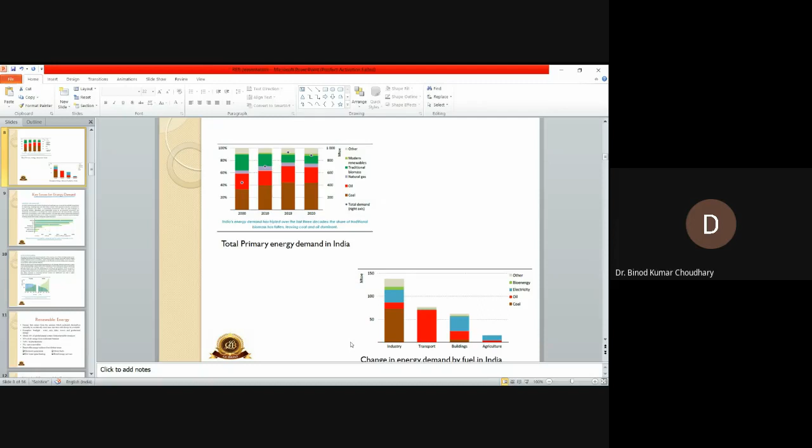Excuse me sir, your slide is not changing. Hello, sir, yes? Your slide is not changing, hello sir. Yes ma'am, tell me. Your slide is not changing, sir. I guess... okay, let me check. Okay, one second. Thank you, sir. Okay fine, just a second. Yeah, now it's okay sir, thank you. Now is it fine?

Yes sir, the total primary energy demand in India—is it visible? I am showing slide number 8.

Yeah, this is slide number 8, sir. Total primary energy demand in India.

The graph on the upper side shows the total primary energy demand in India, which shows the data for total demand: coal, oil, natural gas, traditional biomass, and modern renewables.

We can see it by the different colors. It is in terms of million tonnes of oil equivalent.

Again, we can see the change in energy demand by fuel in India. We can see how industries, transport, buildings, and agriculture utilize different types of energy resources like coal, with around 70% being utilized by industry. These are the changes in energy demand by fuel in India that will occur in the future.

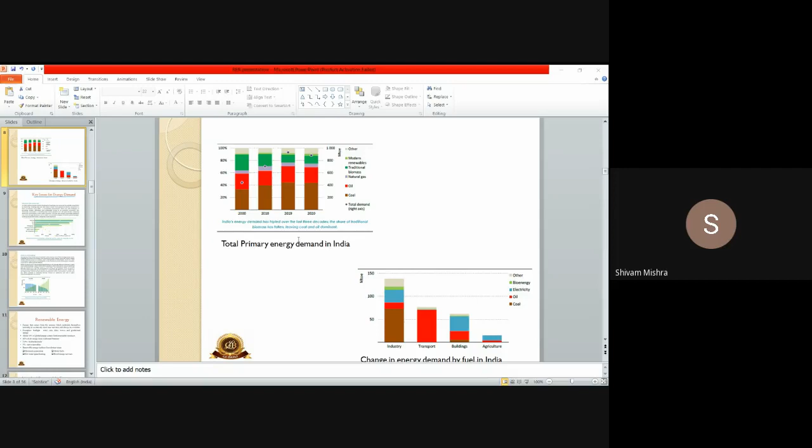Hello, am I audible? Yes, sir, you are audible and visible. Your slide is not changing, please change the slides also. I'm extremely sorry, I'm changing this but it's not being changed, there's some problem. It's okay, just go ahead. No, shall I go with this? If I'm projecting the screen and switching to slideshow mode, it's not being changed. You can put it in PDF format so you can change it. Okay, just a second, let me reshare my screen. Just wait a second. Okay, it's okay, thank you, thank you.

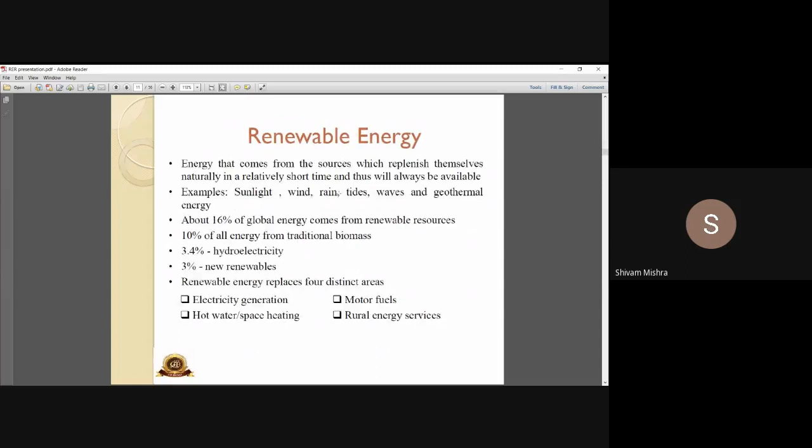So why we need renewable energy. I was discussing this, that energy is a prime source of economic, social, and industrial development of a country. Increase in world's energy consumption day by day means if the energy consumption is increasing, it cannot just be met up by the conventional energy resources. There has to be some unconventional energy resources as well, that must be clean and green energy resources as well. So here comes the need of renewable energy.

Next, still 70% of world's electric generation depends on thermal generation. It means it utilizes mainly thermal power plants. Due to global warming and some emissions constraints, the energy policy makers are having some energy constraints, so the thermal power plants are now being shifted towards the supercritical cycle, and other thermal power plants are also coming into the picture, like those which utilize solid oxide fuel cells. They are based on some CO2 Rankine cycle. So the world is now being shifted from coal and thermal power plants towards renewable energy resources, and they are mainly playing a role to meet up the energy demand.

There are lots of social and economical issues as well with the conventional power plants. World economy is looking for sustainable development, means one has to survive, that plant should be survived for a longer period of time, and that should also not harm the environment as well. So this gives the need and the birth towards the renewable energy sector.

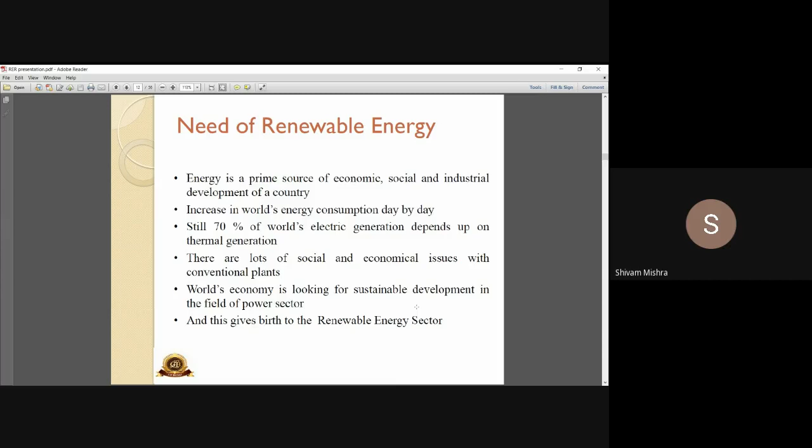So what are the different forms of renewable energies? Here we can see solar energy, wind energy, hydro energy, tidal energy, geothermal energy, and biomass energy. These are some stats that we can see.

These are some stats we can see, on the upper side it shows production, imports, and import dependence. These data are just for India, and this shows that India's domestic production of fossil fuels has not been able to keep pace with the demand, leading to a rapid increase in import dependence over the past two decades. Means we are not able to cope up with the conventional energy resources which are being produced in our country itself. In fact, we are importing this in huge amounts. The graph itself is sufficient to explain that coal, gas, and oil, we are hugely dependent on other countries. So we'll have to import these, and this again results in very higher cost, and obviously it affects the GDP and the economy of a country.

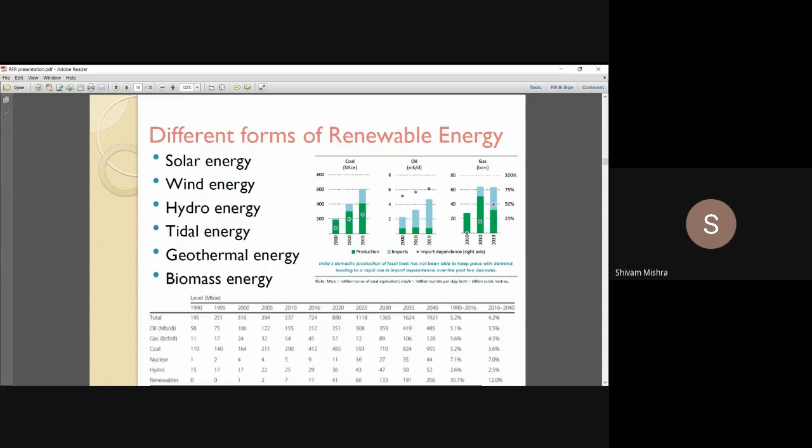This is the annual power sector capacity additions, and with coal capacity growth slowing down and solar PV and wind ramping up, the share of variable renewables in installed capacity has doubled since 2014. The graph shows that the total capacity has doubled as the solar and wind power plants have become functional, and they are also now contributing towards the energy demand rate. So these are taking over the thermal and other conventional power plants, oil, gas, and coal, and these are also playing a very vital role in the economy of our country.

How the solar and the winds are operating, how the solar and the winds are being functional.

This is the most remarkable story in India's power sector in recent years: the growth of solar PV and wind, which have rapidly increased their share of the overall energy mix, as coal and hydro power capacity growth has been slow and steady. Over the past 5 years, solar PV capacity has grown at an average rate of 60%, and wind capacity around 10%, outpacing the 7% growth in overall installed capacity.

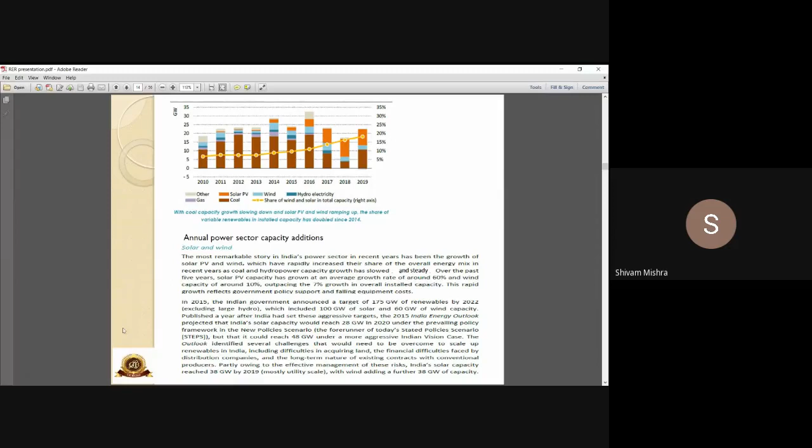So solar and wind are playing a very vital role in meeting energy demand right now.

This brings us to renewable energy utilization and the need for storage. The introduction of variable renewables is one of the primary drivers behind the renewed interest in energy storage. Energy should not only be produced from conventional or renewable resources, it should also be stored in some kind of device, from where we can utilize it further for our consumption.

Hybrid systems and energy storage can play an important role in making renewable-energy-based power smooth and stable. For example, a mandate from the California Energy Commission in the USA requires 1,300 megawatts of storage by 2020.

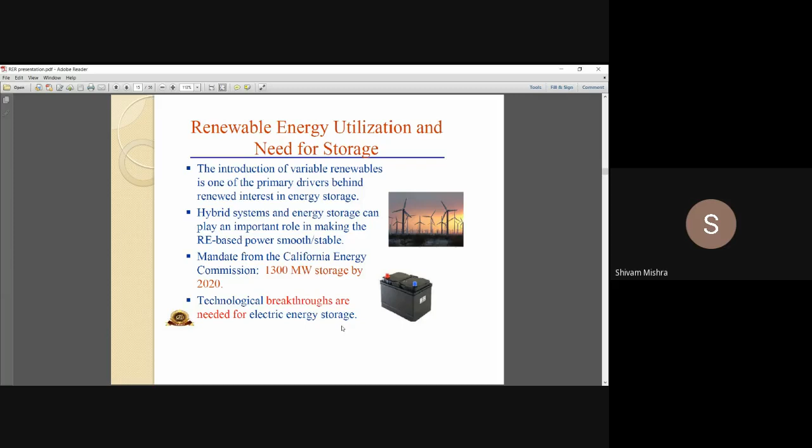Technological breakthroughs are needed for electricity energy storage. Here we see the variety of renewable energy based power generation and storage technologies: wind energy, solar, solar thermal, tidal, micro hydro, geothermal, bioenergy, and hydrogen fuel cells.

These renewable energy resources have to be stored using high power and high capacity batteries, supercapacitors, pumped hydro, and compressed air energy storage.

Everyone knows about the flywheel. It stores energy by increasing its speed, and when it supplies energy back, its speed decreases. Thus it acts as an energy storage device.

Then there are flow batteries, and hydrogen storage. Hydrogen is a future fuel, so it should be stored in some tank or reservoir type device where it can be reutilized.

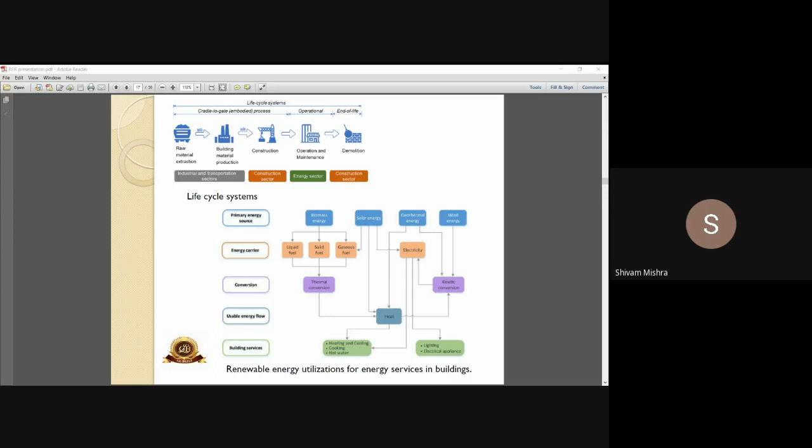Again, I am talking about operational energy and the uses in a residential building. These are the appliances which are used and can be run after these energy resources, like ventilation and air conditioning system—it is operational as well, and has to be maintained as well. Hot water for sanitary use is again required in a building and a smart city. Cooking—renewable energy resources can also provide energy for the cooking purpose. It can be utilized for space heating purpose. There must be huge electrical appliances and lightings as well. So renewable energy resources can be utilized for these purposes in a single building as well.

How can we operate these PV modules? If a solar panel is installed there, how will it be utilized? PV panels will be there.

These are the photovoltaic cells which use the sun's solar energy to charge itself, and then the charge controllers are there. It has some battery bank where the energy is stored. Then AC/DC inverters are there, which convert the DC into AC. Then it is supplied to the distribution board, then again it goes for electricity consumption, and we can utilize it for our home appliances to be run.

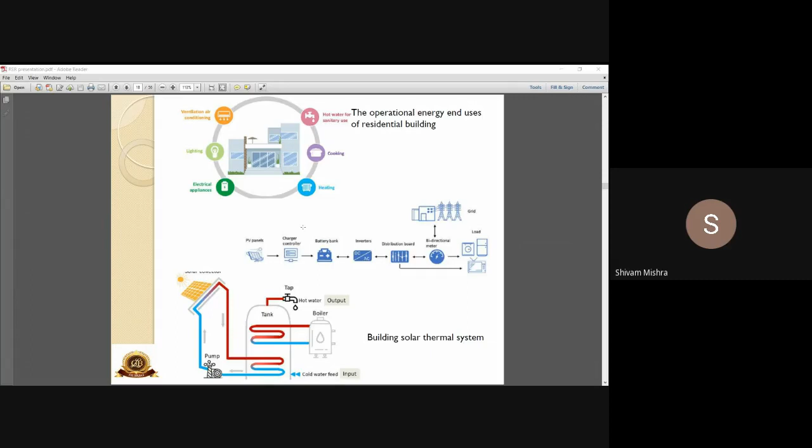A wind turbine can be utilized by installation. These are the blades which are mounted on a shaft. Generally, when the wind blows, it hits the wind turbine at a certain relative velocity, and that relative velocity causes the wind to be lifted.

Drag and lift forces are there, so the lift forces cause the turbine blades to rotate, and that rotational energy is utilized for production of mechanical power. This is again coupled to an electrical generator and a gearbox. Generally, the speed of a wind turbine is very low, hence a gearbox is utilized for increasing its velocity, and the electrical generator utilizes this mechanical energy to convert it into electricity, which is utilized for feeding into a particular area or a particular city.

Biomass fuel utilization can also be there, that wooden pellets can be burned, and after that this goes into the pellet boiler, where the water is boiled at a certain pressure and temperature. Then the maximum portion is stored for the buffer purpose, then it is utilized in a particular building for space heating, hot water utilization. That hot water can be supplied for any electrical appliances or household purposes.

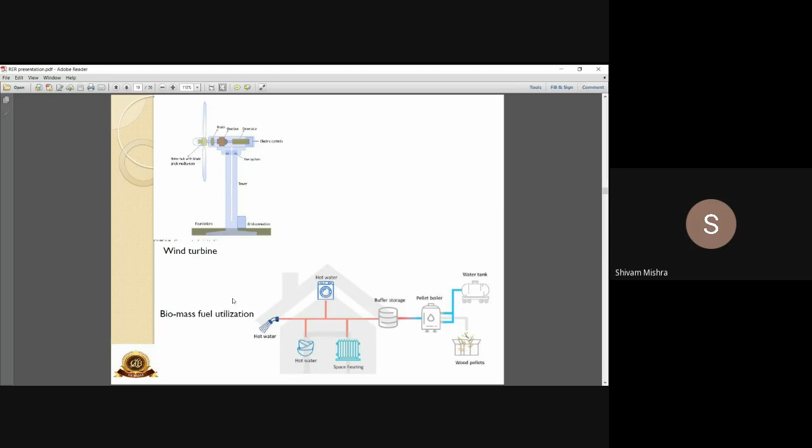And in turn we can utilize the renewable energy even for a single building itself. So let's start with the solar energy.

Sun is a very huge source of energy in our universe. It has a diameter of 1.4 million kilometers and radiates 3.8 into 10 to the power 20 megawatts of electromagnetic energy.

On average, 170 peta, that is 10 to the power 15 watts of solar energy reaches the Earth's surface continuously every day. About 38% of this energy is in the visible range and can be harvested in part by solar photovoltaic arrays, so almost 40% of the sun's energy reaching Earth's surface can be utilized for electricity generation using photovoltaic cells. These are the solar spectrum ranges.

Visible light has a wavelength between 0.4 to 0.7. It's the 40% of this visible range reaching the Earth's surface that can be utilized for photovoltaic cells and electricity production.

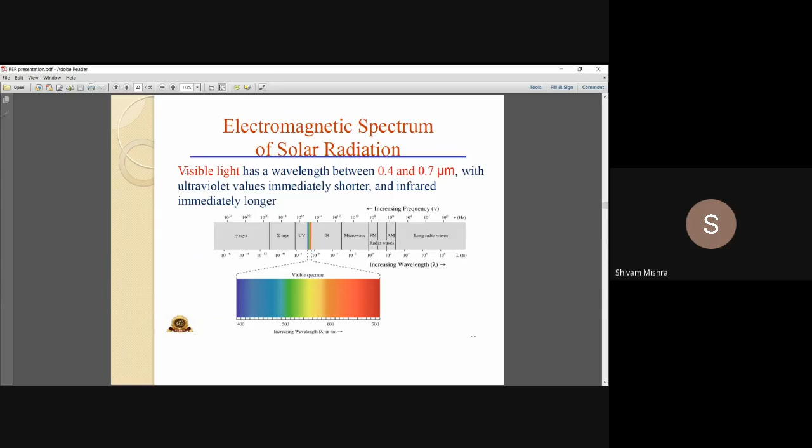The sun is an abundant source of energy. Our current world energy consumption can be met if we globally tap sunlight over only 1% of the incident area at an energy conversion efficiency of 1%. This means if we can utilize only 1% of the incident radiating solar energy, we can meet up the energy demand worldwide.

About 9% of the planet's surface area is taken up by desert, and efficiencies well over 1% are possible. Thus, exploiting massive economy of scale by establishing large areas of solar collectors in hot desert regions could open up exciting future opportunities. So the sun is an abundant source of energy and can be utilized to meet worldwide energy demand at efficiency well over 1%.

Solar energy and conversion technologies: first, solar PV. PV modules are generally installed on the roof surface and utilize solar energy to store it in the form of energy. A battery converter, an inverter, converts the DC to AC, which is then utilized in our appliances and supplied for household purposes.

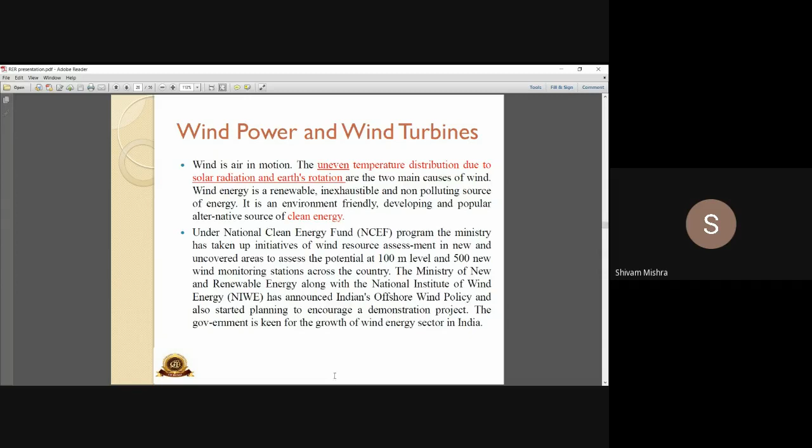This is the state-wise data, which shows that starting from 2014, 2015, it has been continuously increasing over the years. This is the data on the vertical axis - we can see the data state-wise, and with each year its capacity is being increased continuously.

Tamil Nadu has 7276 megawatt capacity in 2014, and this is tentative data for 2017, showing around 24.2% of total energy utilization - that is the total energy being produced from wind in Tamil Nadu.

Wind power classification - we can see how the wind power is affected based on different air qualities. The air quality is shown by color code across the Indian map. Poor quality is when wind density is around 0 to 200 watts per meter squared for a 50-meter turbine installed at a certain place. Marginal is between 200 to 300, fair is 300 to 400, good is 400 to 500, and we can see this represented by the color code.

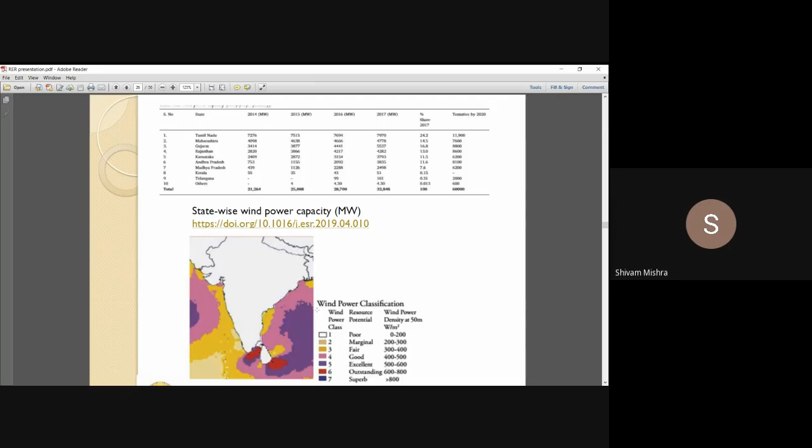We can see that during offshore and coastal regions, the density is mainly good to excellent, and outstanding at some places, and superb at others.

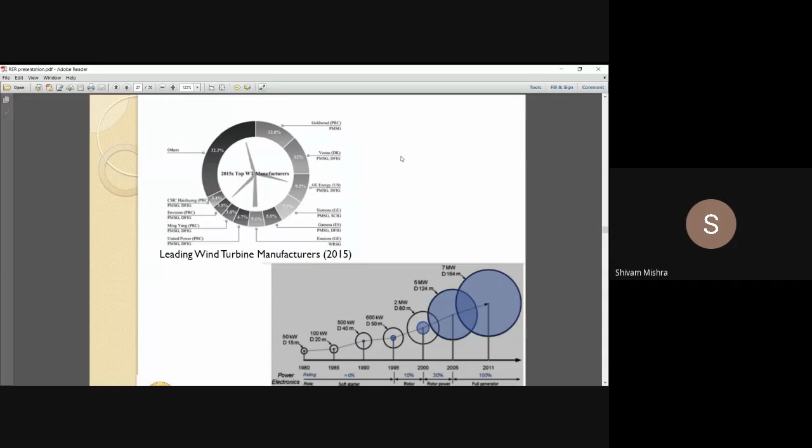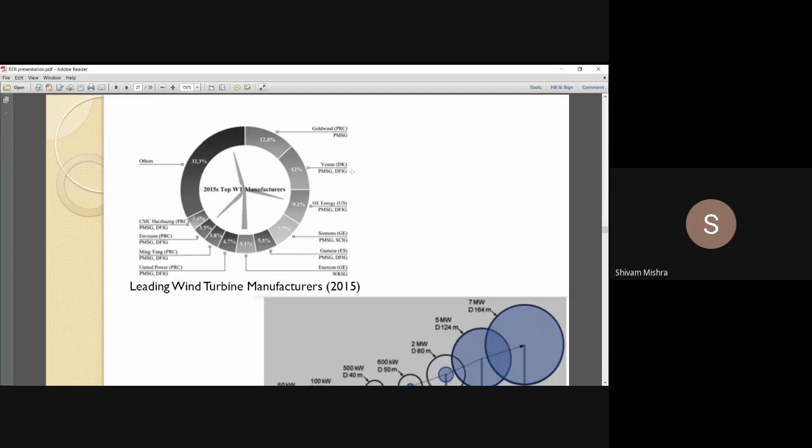These are some leading wind turbine manufacturers, which produce specific wind power energy, and the turbines are designed by them. These are the percentages - 12.8% is covered by Goldwind turbines, then Vestas is covering around 12% of total energy.

Here we can see the evolution of wind power and the power level converters. The blue color shows the power level converters, meaning how sufficient we are now to convert it into this. The diameter is 164 meters.

The wind turbine diameter is 164 meters. We started in the 1980s when the installed capacity was 50 kilowatts, then it increased up to 100 kilowatt capacity in 1985, then 500 kilowatts in 1990. According to data from 2011, a wind turbine designed for a 164-meter diameter would be capable of producing around 7 megawatts of energy.

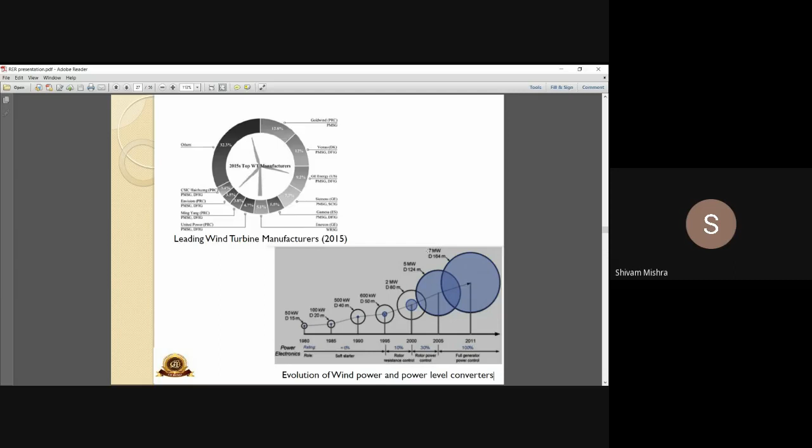But wind turbines cannot be installed everywhere - there are constraints and challenges. Depending on the country, these challenges include lack of evacuation and transmission infrastructure. Not every government provides evacuation and transmission infrastructure. There should be transmission infrastructure, and the land should be away from population, free from it.

Evacuation will have to be there. Other challenges include incoherent resource assessment and land availability. Land availability is a major challenge for installing wind turbines at a particular place, because not every geographical region has available land suitable for wind turbine installation.

Inadequate forecasting tools and grid management are one of the major flaws that every country goes through. Forecasting tools are not optimized enough to predict wind behavior, or how much power will be produced by a certain wind turbine capacity. There must be more efficient forecasting tools, and grid management is also responsible for this.

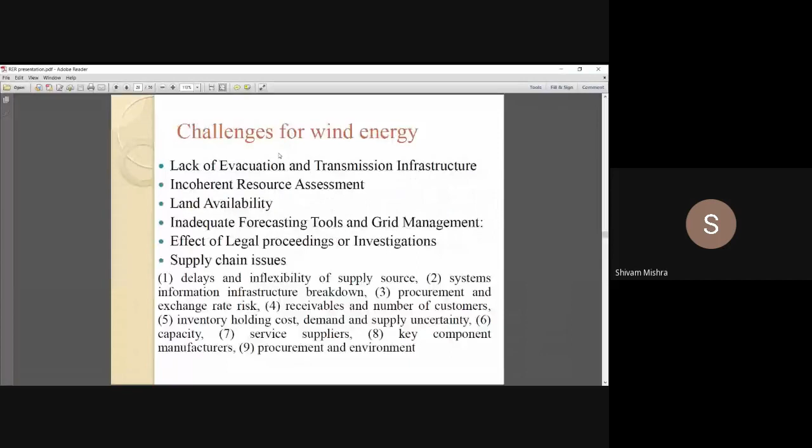Now we will move towards hydro energy. Hydropower plants capture the energy of falling water to generate electricity. A turbine converts the kinetic energy of falling water into mechanical energy. Then a generator converts the mechanical energy from the turbine into electrical energy.

These are the things which utilize hydro energy in our country. There are some dams installed, like Bhakra Nangal Dam, Rihand Dam, and Hirakud Dam. These are the sites where these hydropower plants have been located, and they utilize hydro energy to convert the energy of water into electricity.

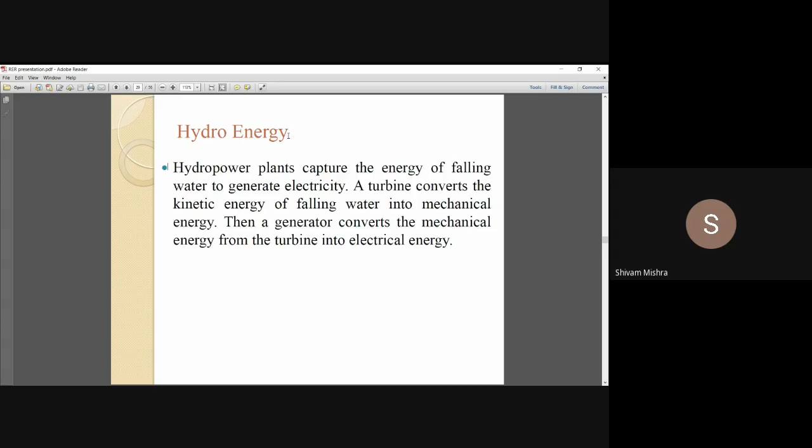So here we can see that these dams are made against a reservoir. A huge basin is there, a reservoir of water. There are some valve houses which open up, and through the dam the water comes from the reservoir. Then there is a penstock in which this water runs, and it is again fed to the turbine portion through the runner.

Passing through the runner, it goes to the turbine portion that utilizes the kinetic energy of the water, depending upon the turbine, whether it is a tangential turbine, a reaction turbine, a Pelton turbine, or an axial turbine like Kaplan or Francis. It utilizes the kinetic energy of water and produces power, because a generator is coupled with these turbines, and that produces electricity that is fed to the population which needs it.

The amount of electricity a hydropower plant produces depends mainly on two factors. First, how far the water falls - the farther the water falls, the more power it has, because the potential energy of that water is being converted into kinetic energy.

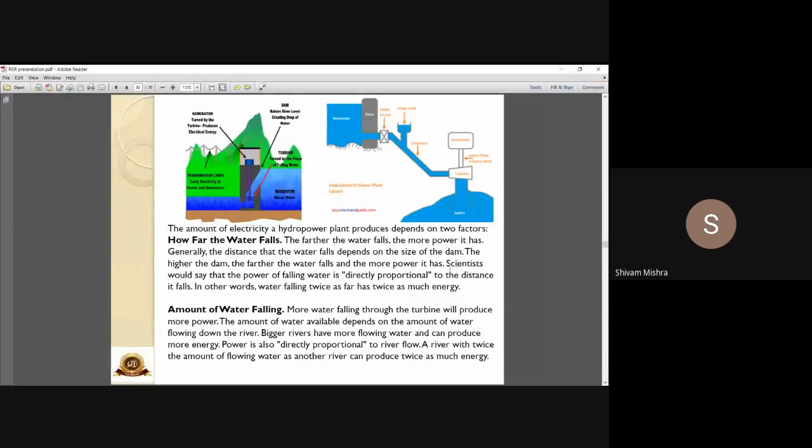These are the global hydropower installed capacity figures. The total global hydropower installed capacity reaches 1308 gigawatts in 2019, as per data from the International Energy Outlook 2021 and the Hydropower Status Report 2020.

This is the global level hydropower installed capacity. The pink portion shows that China has the maximum installed hydropower capacity, and recently India has left behind Japan in installation capacity, now coming to the worldwide position of 5th.

So these are the hydropower capacities and generation by region. Installed capacity is given on the left hand side, and estimated generation is given on the right hand side. This shows that for East Asia and Pacific, the installed capacity is 487 gigawatt.

In Europe it is 251 gigawatt, North and Central America it is 205, South America it is 176, and continuing with Africa, it has the minimal installed capacity, which is 37 gigawatt.

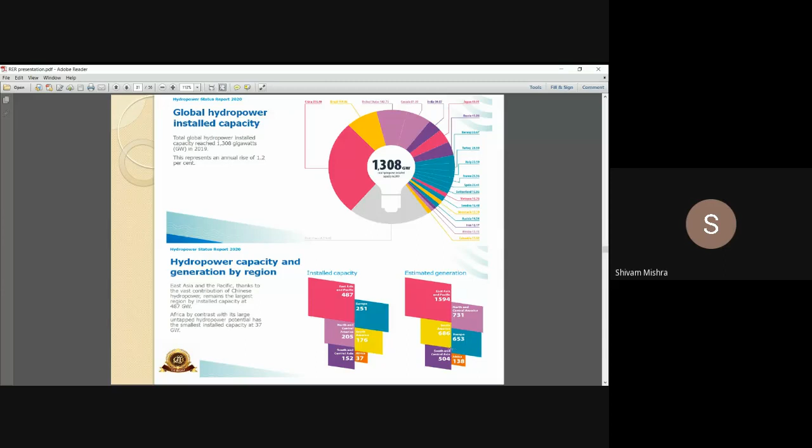On the right hand side we can see the numbers, which show the estimated generation after installation of this hydropower capacity. The highest is for East Asia and Pacific at 1594 gigawatt, and for Africa it is the minimal, which is 138 gigawatt.

New installed capacity by region in megawatt. In 2019, 50 countries added hydropower installed capacity. The region that added the most capacity was East Asia and the Pacific, followed by South America, and then South and Central Asia. These are the regions now shifting towards renewable energy, mainly supported by hydropower plants.

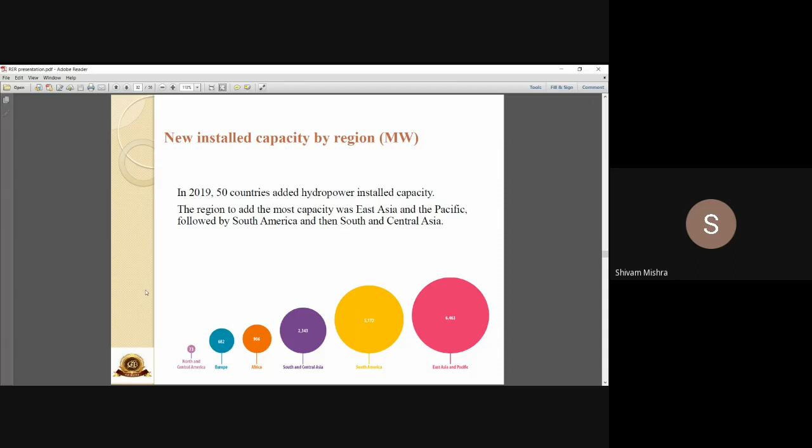Next is tidal power and its utilization. Tidal energy or tidal power is a form of renewable energy obtained due to alternating sea levels. It utilizes the natural rise or fall of tides due to the gravitational attraction forces of the moon, sun, and earth. The kinetic energy from the natural rise and fall of tides is harnessed and converted into electricity.

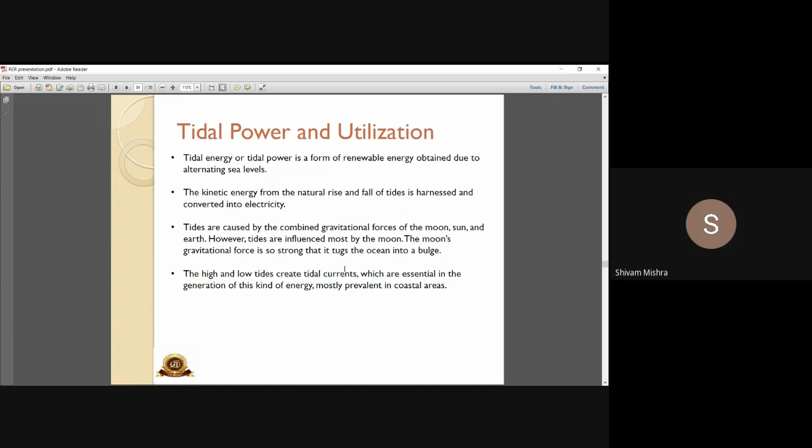Tidal energy utilization techniques: tidal turbines are there, which utilize the same technology as wind turbines. Like I told you with wind turbines, these turbines have blades which are aerofoil in shape.

When the air flows, it hits the blade at a certain angle, with a certain relative velocity as well. So when the wind hits the turbine, it rotates the turbine blades, which in turn is coupled with the gearbox. Generally the speed is very low, so using the gearbox we can increase the speed. Then it is coupled with a generator that utilizes the wind energy to convert it into electrical energy, which is fed into the nearby regions or to the grid.

Tidal energy utilizes the same technology as wind turbines. The only difference is that the blades of tidal turbines are much stronger compared to wind turbines, and these are shorter as well.

As I already told you, if a diameter of 164 meters was utilized, 7 megawatts of power was being generated, as shown in the last slide. So the best way to compare the tidal turbine is underwater windmills. Ideally, water currents turn the turbine like it's done in case of wind turbines. The turbine is connected to a generator through a shaft, so when the turbine turns, the shaft also turns and produces power.

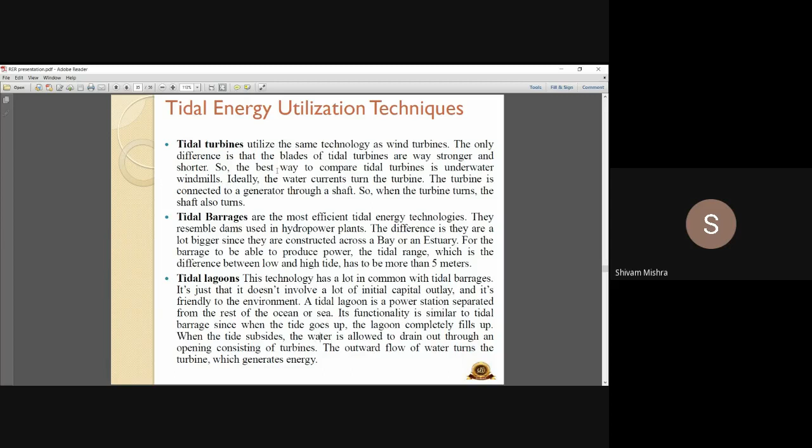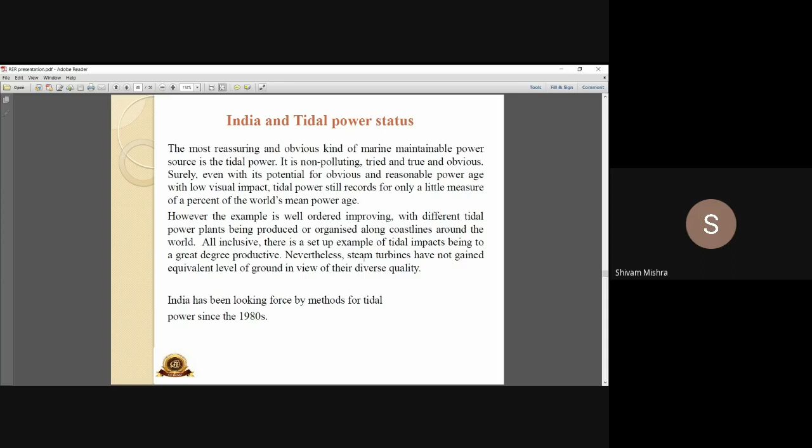Status update: there were reports on harnessing this energy from the Panchpada region in Odisha and the Andaman and Nicobar Islands. The Ministry of India is working on a tidal project. The Ministry of New and Renewable Energy made an assessment of the capacity of tidal energy in India, and it is evaluated that the nation can generate 7,000 megawatts of energy in the Gulf of Khambhat.

Am I audible? Hello? Hello? Hello, ma'am, am I audible? Yes, sir, hello, you are audible. Oh okay, ma'am, okay, okay, fine.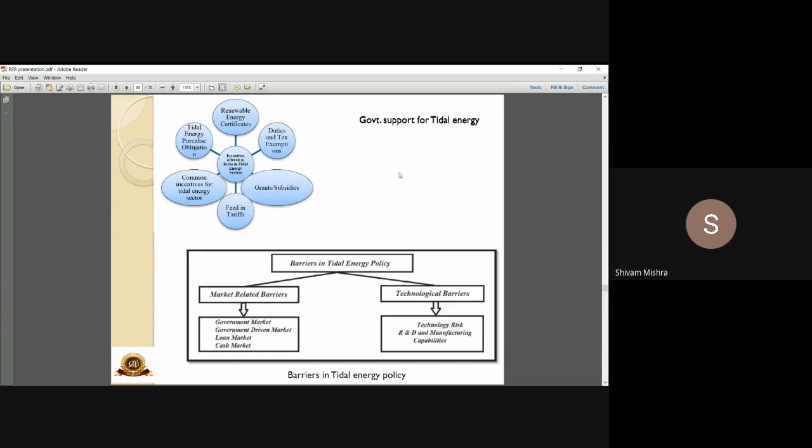These are the barriers in tidal energy policies - market related barriers and technological barriers, including government driven market, loan market, and cash market. One has to be very clear about utilization - if a state is installing and going for tidal energy to meet its energy demand, that state has to be very clear about these things they have to tackle. Technological barriers include lacking R&D and manufacturing capabilities. There's technology risk if utilizing technology from another country through a joint venture, which requires very high cost, and technology transfer should be beneficial for your country as well. These are the barriers in the path of utilizing tidal power in the Indian system.

The conventional design of tidal turbine is not feasible, so we'll have to come up with latest software and technology to design a tidal turbine which must be efficient enough to produce enough power to meet the demand. Construction cost is very high initially, so you will have to invest in that. Limited feasible location is the main major issue that comes up.

If you are into coastal areas, there are lands that are evacuated and vacant - plants can be installed there, but not everywhere. The conventional barrage system is very expensive and follows a very slow process. Barrages affect fish migration and other wildlife - it's a threat to wildlife as many fish like salmon swim up to the barrages and are killed by the spinning turbines. The fish ladder system is never 100% effective, so it remains a threat to wildlife.

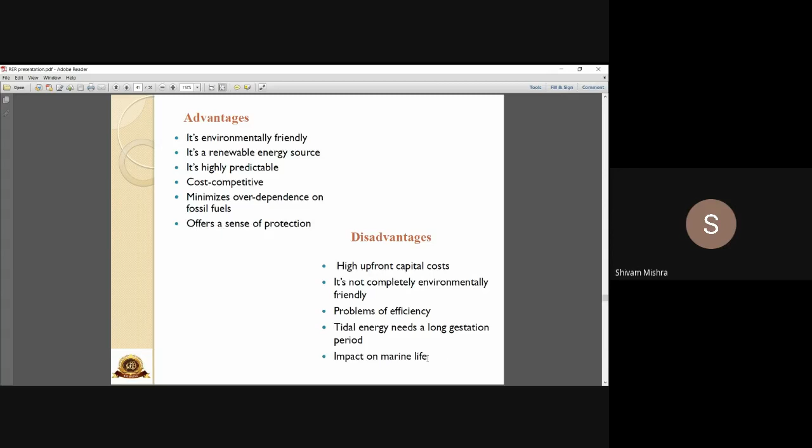Tidal energy needs a long gestation period, and there is an impact on marine life, as we discussed earlier.

Another source is geothermal energy. It utilizes the earth's thermal energy found beneath the surface. Geo means earth, and thermal means heat. It is generated by the heat stored beneath the earth's surface.

We can use the steam and hot water produced inside the earth to heat buildings and generate electricity. A well is dug, and a pipe is bored into that portion, since the temperature is very high and thermal variation is present.

Due to the thermal variation and high temperature below the earth's surface, cold water is poured and supplied into that portion, and it is pumped back as it converts into steam. This can be utilized for any purpose, such as process heating, heating buildings, or meeting the electricity demand of a particular area.

Geothermal energy is a renewable energy resource because water is replenished—it is abundant and collected on the earth's surface by rainfall—and the heat is continuously produced inside the earth as its temperature is very high.

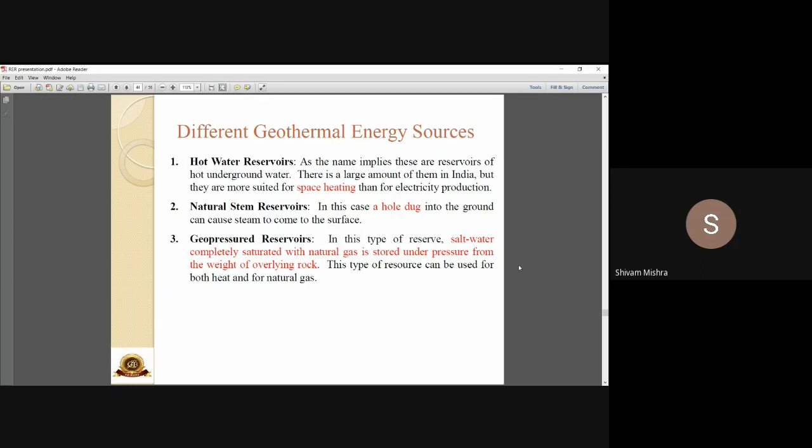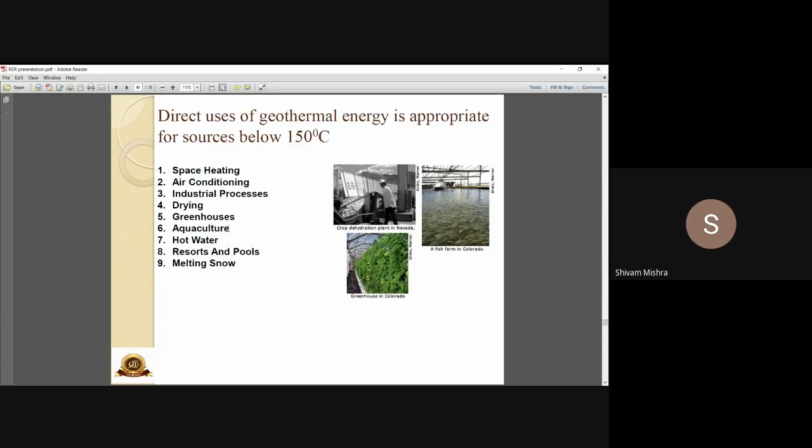So these are the geothermal energies. Similarly, we have geothermal energy resources like hot water reservoirs, natural steam, and geopressure reservoirs that utilize the temperature gradient. These can be used for process heating, air conditioning, industrial processes, crop drying, aquaculture, hot water, and melting snow.

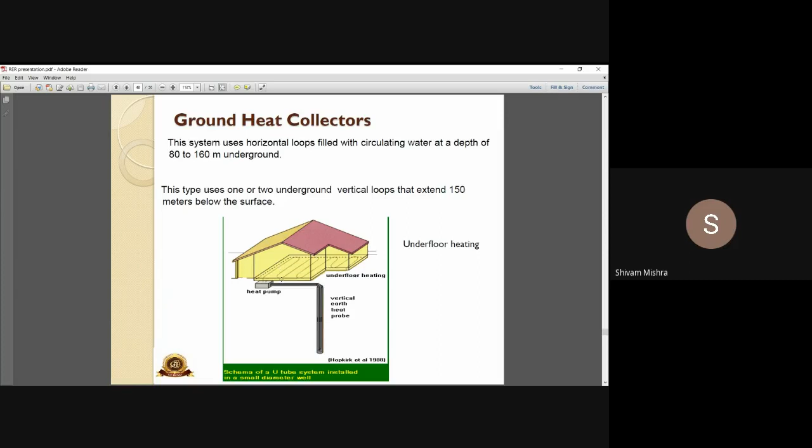The uses can be direct or indirect, as shown in the figure: a well is there, and a pipe is supplied to that portion where the temperature is present, and steam is pumped for process heating or floor heating purposes.

The generation of electricity is appropriate where the source is above 150 degree centigrade temperature. A production well can be utilized, where steam is imparted toward the turbine to produce electricity.

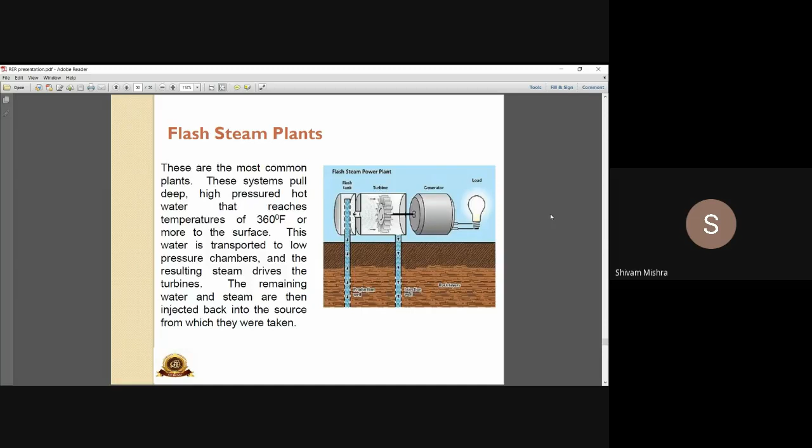These are flash steam power plants and binary cycle plants. Hot dry rocks, which are natural, work as hot wells and can again be utilized for process heating and floor heating purposes.

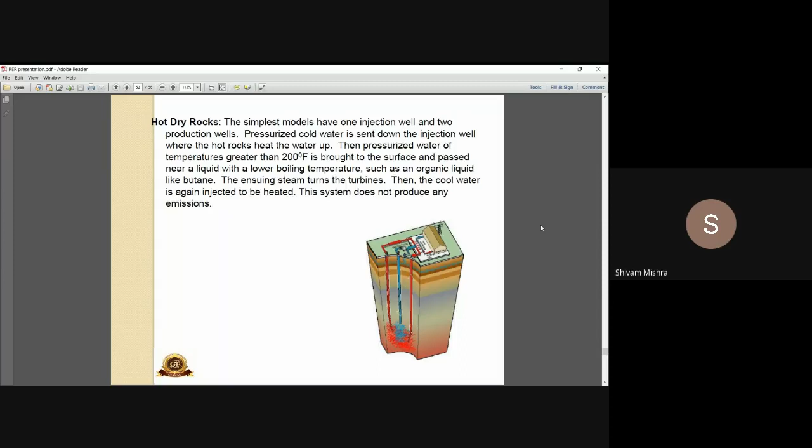Harmful effects include brine salinating soil if the water is not injected back into the reservoir. Extracting large amounts of water can cause land subsidence, and this can lead to an increase in seismic activity.

That's all from my side. I have mainly covered these things. We already know that a lot has been discussed, that renewable energy is the next thing every country and the world is switching towards.